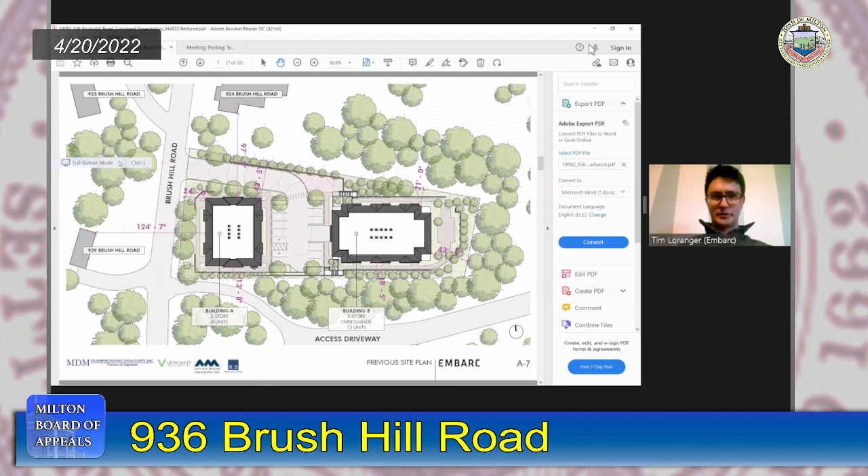Can everyone see this? All right, there we go.

I'm going to walk through the decisions that led to the revisions we've made, and look at a broad picture of the updated site plan, as well as some conceptual architectural floor plans, before turning it over to Blair to run through the conceptual landscape plans.

Before I do that, I want to remind everyone where we were on the previous site plan and the feedback we were hearing in terms of what wasn't working about it.

So we had the two-building approach. There was a 2-story, 8-unit building at the front of the site with a 24-foot setback from the property line, and then the larger 3-story building with 2 levels of residential over the garage with 12 units towards the rear of the site, with a parking area used for fire access maneuverability at the center.

The 3 main issues we were hearing were lack of maneuverability and access for emergency vehicles, as well as everyday trash and deliveries, and an over-reliance on retaining walls, particularly at the edges of the site to get the grading to work, which would significantly impact the existing vegetation that buffers the site at each property line.

And then, as Jesse alluded to, just having too much presence on Brush Hill Road and being much closer to the road than the rest of the context, not providing a significant setback and open space that would fit the nature of the scenic road.

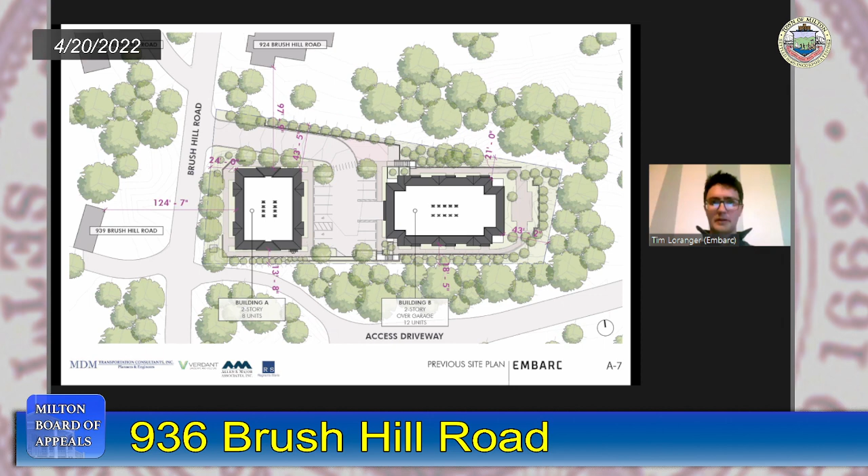So the goals we walked into this with were, as Jesse noted, to consolidate the buildings to create a more efficient footprint that we'd slide back in the site to increase that front yard setback and give us more space to work with, and in doing so, minimize the presence from Brush Hill Road, both physically and visually.

In lieu of having that front building, we used the extra space to improve vehicle maneuverability, particularly for emergency vehicles, but also for everyday delivery and passenger vehicle traffic. We also worked to simplify the grading and minimize retaining walls at the edges of the site, reducing the impact on existing trees and landscape buffer, both at the property line and beyond. Finally, we provided additional programmed usable outdoor space for residents and created a pedestrian connection to Brush Hill Road with the bus stop.

So this is just a very diagrammatic plan showing the building footprints from the previous scheme to where we are now. Outlined in red is the two previous footprints, and the dark black line is the new one.

We've consolidated the two buildings into a single 65 by 175 foot building. It's about the same width as the existing rear building, and we've also slid it back about 10 feet on the site.

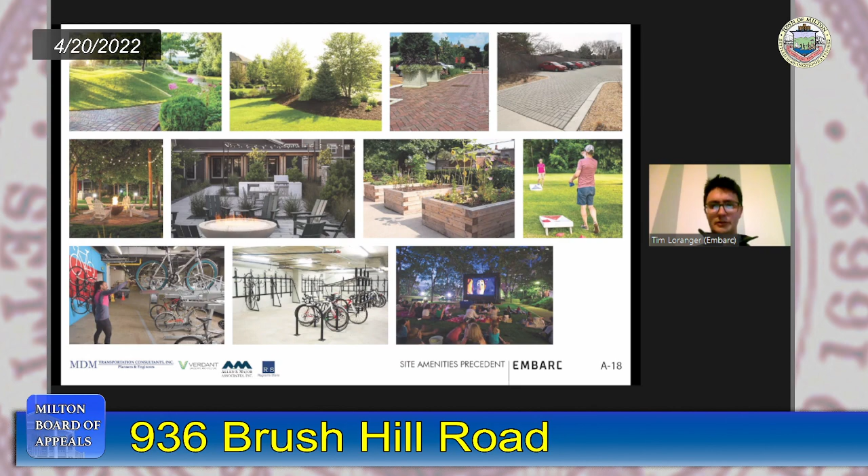So with that, I can hand it over to Blair Hines from Verdant Landscape, who can just walk through the general overall landscape plan and the approach he's taking. There are only a couple of slides here.

Can people hear me? Hello? Okay, great, thank you. So for the record, Blair Hines, Principal Landscape Architect at Verdant Landscape Architecture. A lot of what I'm going to be saying is repetitive to what Tim has just gone over, but just to set the frame here, we're thinking about three primary purposes for the landscape.

I think it's changed significantly in terms of one important goal, which is to fit into the neighborhood. As Tim indicated, we've been concerned about the character along Brush Hill Road, and by shifting the building towards the rear of the site, it creates further setback and provides the opportunity to create landscape more in keeping with the character of the area.

Our thought was, as Tim indicated, to create a raised berm by extending the grading from the Curry College site towards the north, then plant this berm with some large shade trees, creating a landscape that feels similar to other abutting residences along Brush Hill Road. I'll go into that in more detail after covering two other important points.

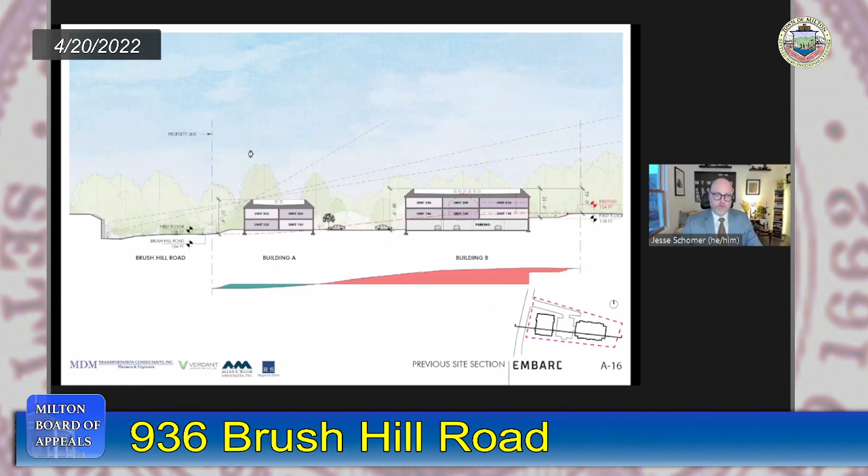Tim, do you have that figure in your presentation? Pretty sure it's 12 feet. That's roughly 12 feet. And so I think that's part of what we're thinking about is what's a reasonable amount of pavement in terms of providing necessary access, not only for residents, but for vehicles. And we hope the fire chief is flexible in his mind.

And that would include in both cases the sidewalk, but you didn't have an independent dimension on the sidewalk, did you? The sidewalk is 5 feet wide, the one that goes from the parking court and lobby down to Brush Hill Road. That's 5 foot wide. And that's accessible? Yes, it is. The grading is fairly flat at the front of the site here, so the way we're bringing the topography to create the berm, it kind of runs parallel to that, at the bottom of it.

Thank you, no further questions. So just to reiterate, as Tim had mentioned before, the building's first floor is significantly lower, so there's not a whole lot of difference from the parking court now and Brush Hill Road. Part of the purpose of the berm is to create a little bit more landscape by extending the elevations that are in the Curry College site to the south into the site so that it tucks that parking below grade. Where's the handicapped entrance to the building?

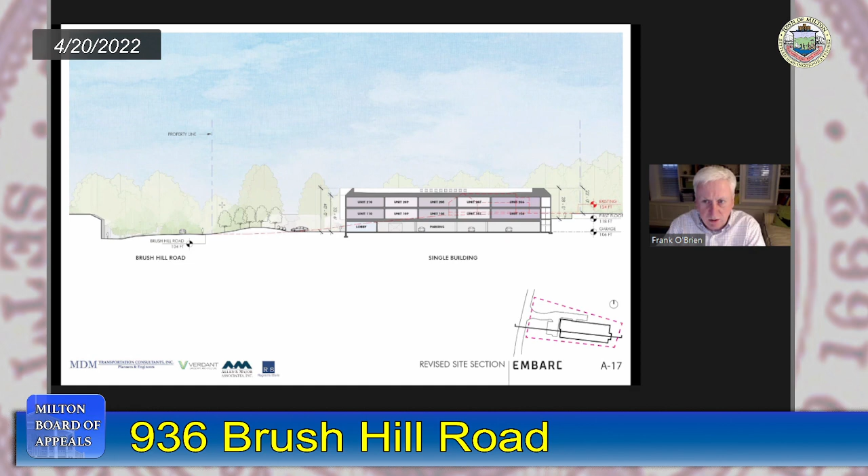I believe it was noted during your presentation that the newly redesigned building is the same height as the originally proposed second building. Is that correct? That's correct, yes. Okay, so I'd love to see, as Mr. Mullen would, some visual presentations regarding the visual impact from across the street and standing in the street. So I join him in that request.

The second thing I'd like to ask about is the raised parking table. This sounds like, now that I've heard one of the plans is to put some of the drainage-related apparatus under that particular location, this sounds like it's going to be a pretty important piece of the project going forward. Would you agree? Yes, yeah, we would agree with that. Okay, I see a lot of shaking of heads - there's a shaking yes, okay.

What is meant? Explain to the lay person what is meant by a raised parking table. Well, you'll see this in urban areas where traffic has to come up to essentially sidewalk elevation in order to slow traffic down, then it goes back down at an intersection. A lot of Cambridge roadways are that way. What it does is keep people from zooming into that space because they're coming up six inches in elevation, which forces vehicles to slow down. There's no reason we need speed in such a small circulation system here, so it helps reinforce that.

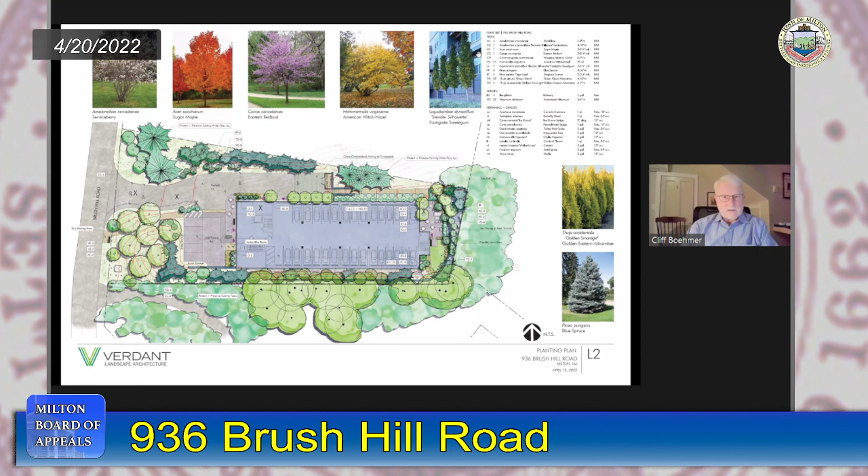I think, well, at a minimum, there needs to be an overrun for the elevator. So there's space that would generally go above the roof level by 4 feet, something like that. I think the overrun has to extend something like 12 feet above the top floor that's served by the elevator. So there is a parapet proposed on the building. I think we need to see that in the massing and the renderings, how that will work.

If there's a stairwell that's going up to service the roof, which the fire department may want, I'd recommend that be the rear stairwell, not the front stairwell. But it's a point well taken - they're not proposing a roof deck. If you had a roof deck, that would be a much more significant appendage onto the roof. But in a normal design, with a decent sized parapet, you'd want to look at the sight lines from the street, and I would expect to see what that would look like in the renderings that they're going to produce.

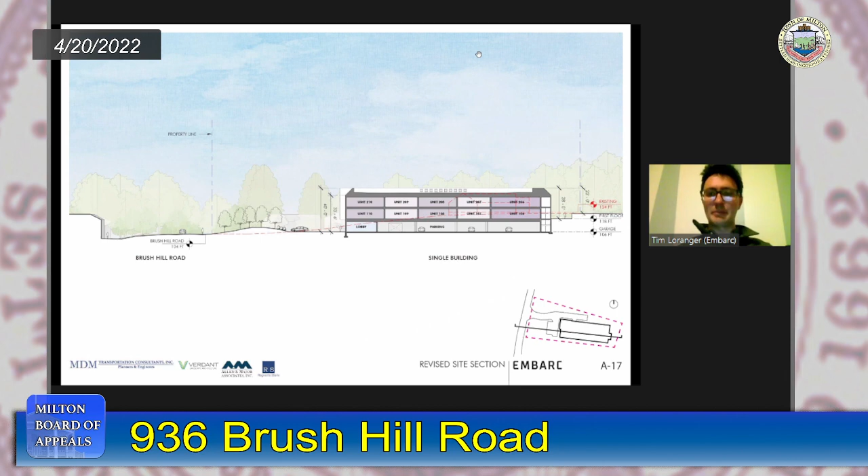Yeah, that's actually something we're looking at right now as we're working through the massing and the roof line. But we plan on staying similar to the existing aesthetic and design of the original rear building where we had that pitched gable roof. And because the elevator itself is set inboard a bit, there's enough space to basically capture that within the gable roof without it poking up above that. To Cliff's point, it's about 4 feet, give or take, generally about 12 feet from the floor itself, the last floor you're landing on. So there's adequate space. We're certainly going to work the massing and shape of the roof line to capture the elevator overrun within it and not have anything that pokes up above the roof unnaturally.

And also, I meant to mention this earlier in the presentation, an additional benefit of having that internal circulation is we do have that common stair access to the roof that can serve the mechanical equipment that will be up there, but also be used by the fire department for direct roof access, which we didn't have in the previous scheme.

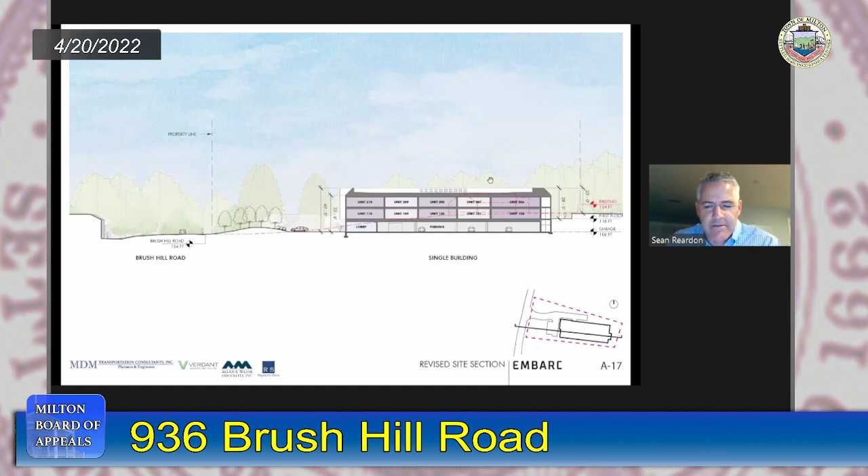Sure. Good evening, everybody. Again, for everybody's reference, Sean Reardon, I'm the board's technical reviewer for civil engineering and traffic. First and foremost, great meeting with the team. I think what we see here is really a thoughtful and responsive effort to address almost all of our comments. What I'm particularly struck by is, in listening to the presentation, really sound reasoning behind every decision, which I don't know was there in the beginning, but clearly every little thing has been thought about, which I appreciate. So it's the sound reasoning behind the decisions that really makes me feel we're on the right track.

Big takeaway: anything that makes a more efficient building and parking layout means there's less complexity in the design, less problems in the design to get utilities in, to get traffic around. So really consolidating the building into one single form goes a long way into creating the breathing room that we're typically looking for. Adding to that, the building type is a lot easier to fit into a difficult landscape, as Tim mentioned. So eliminating all these exterior doors and the sidewalks that need to extend to them makes it much less of an effort to make the building fit within the lot. So, all positive things, and significant benefits in contrast to the prior application.

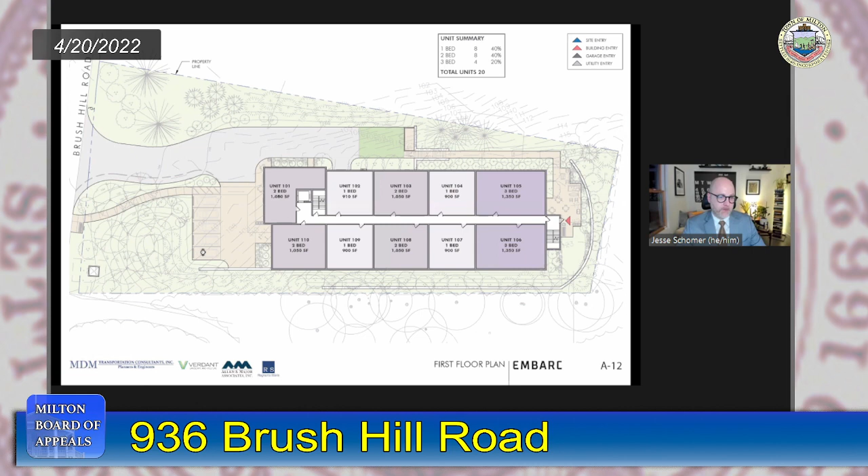We've taken an initial look at this, and Phil or Paul from Allen Major will go into this in their presentation of civil. It does have some challenges with making that connection, due to the fact that the grade in that section of the site is challenging, because at that point the site is grading up towards the rear at the same time as the Curry College driveway is grading down. So making that connection would be somewhat challenging in a short distance, with going up and going down, and then also making that curve needed to connect to the Curry College driveway.

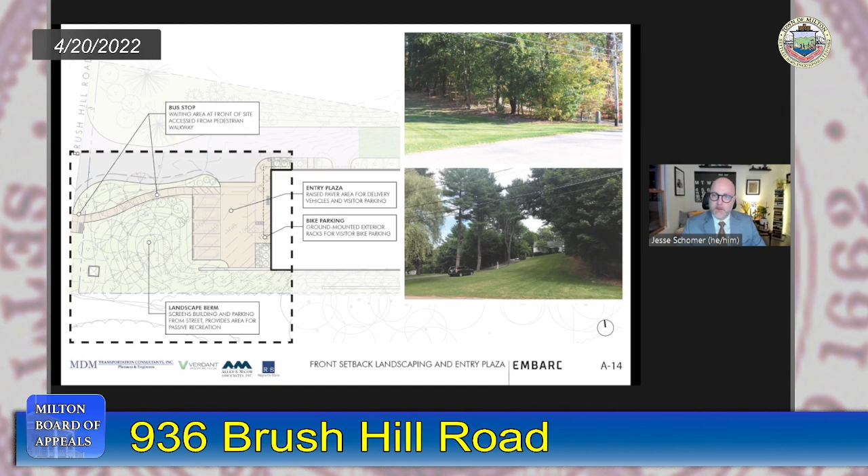So initially our impression is that it's not likely to be feasible, but we're not ruling it out at this time. And that's one of the issues we'd like to discuss with Chief Madden when we meet with him and Sean, to get a sense from him as to whether that's a connection he feels would be useful to add to the site, whether it would add anything to his accessibility to and from the site.

If he feels that it's important, then that's something we're certainly willing to explore. We would need to explore that with Curry College themselves, because at this point we don't have any legal right to make that connection. So that would be something to discuss in terms of acquiring an easement from them if it proves feasible. That's an issue we're certainly looking into. We haven't ruled it out yet. We're taking it seriously, and we'll have more information for the board hopefully when we present on civil.

Thank you, Mr. Schomer. For the record, that issue has not come up in the course of the public hearings before the board. So this is the first hearing where that possibility has been mentioned, though I was aware it had been discussed during the work sessions. Thank you for that.

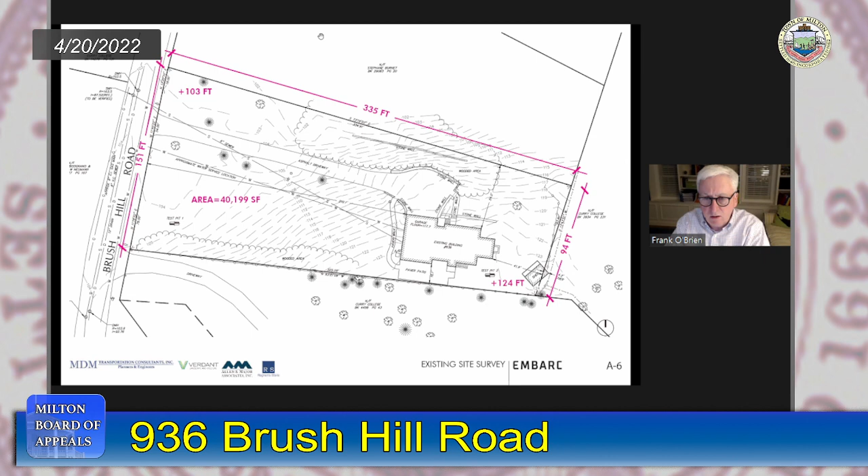Before I go back to you for a moment, Mr. Hines, you had signaled you might have had something additional to add. Yeah, I just wanted to add, to answer Sean's question, that the landscape plan did include a grading plan, which has been initially coordinated with Allen and Major, showing conceptually the grading we're proposing.

Was it provided in this package? You're on mute. Excuse me. The lines in red are the grading lines, and they're completely all around the building, from the property line into and around the site.

All right, they're pretty hard to see on the version that we have, but looking more closely I can see those. I think we're going to have to pay some attention to the grading plan. Mr. Reardon, do you have any comment that you'd like to make?

Blair, please don't take this the wrong way, but I generally assign more certainty to engineered grading plans than landscape architects' grading plans. So no offense taken. Incorporation of all the different handicapped accessibility and all the minutia that typically only engineers care about, that you guys sometimes take license with, but understood. I appreciate the grades being on the plan though. Thank you.

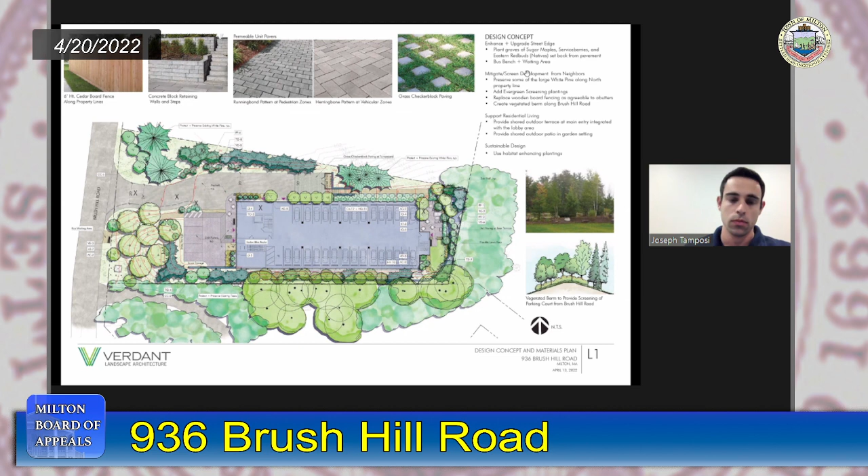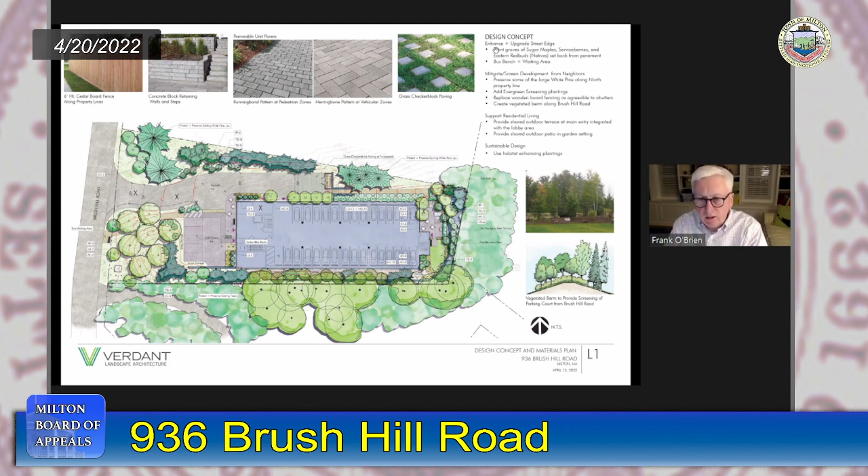Thank you, Mr. Tamposi. All right, at this point in time, I'd like to get a sense of the board regarding overall reactions to the conceptual drawings here, and a little bit of the plan for moving forward.

I, for one, am pleased to see some progress here. I think that this rendering, these concepts are somewhat improved from some of the original designs that were presented, and at least it merits further consideration on the part of the board. There remain, as there always are, a number of details that need to be fleshed out for further consideration and review by the board and by our peer reviewers. But pending that, I'd just like to get a sense from my fellow board members on what your opinions are at this point.

Mr. Mullin, do you have any additional insight than what Frank's offering? I think it appears to me to be an improvement, but I think there's some more work to be done, and I'd like to see that work. I'd like to hear from the neighbors, and I'd like to hear from the peer reviewers.

Thank you, Mr. Mullin. Mr. Gray. I think this is definitely moving in the right direction, and I second your comments and Mr. Mullin's comments - this provides a good basis for moving forward, but we need to see more details and have input from the neighbors. That's all. Thank you.